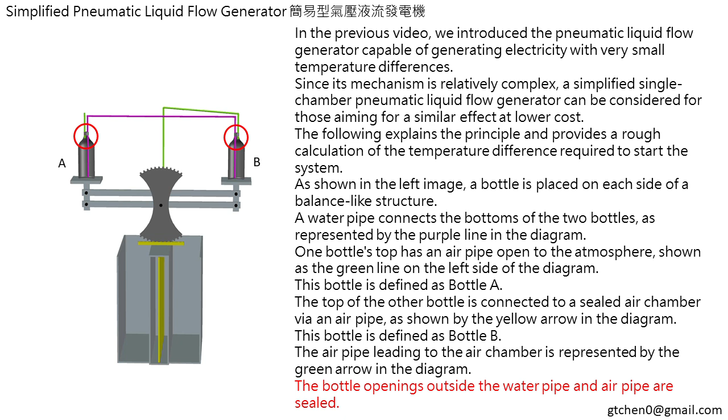The top of the other bottle is connected to a sealed air chamber via an air pipe, as shown by the yellow arrow in the diagram. This bottle is defined as bottle B. The air pipe leading to the air chamber is represented by the green arrow in the diagram. The bottle openings outside the water pipe and air pipe are sealed. The air chamber has two water tanks on either side, one for hot water or other heat sources, and the other for cold water or cooling sources.

Inside the air chamber, there is a thermal insulation plate, shown as the yellow partition at the bottom of the diagram. Above the air chamber, there is a device to guide the movement of the thermal insulation plate, which is linked to the angle of the balance. To maintain better airtightness in the air chamber, this device can use magnet-to-magnet remote linkage.

In the initial setup, low-temperature gas is first injected into the air chamber, and an appropriate amount of liquid is added to both bottles. As shown in the left image, due to gravity, the balance and the thermal insulation plate will tilt to one side. If cold gas is used initially, adjust the balance so that the thermal insulation plate tilts towards the side where cold water will be added. At the same time, bottle B will have more water than bottle A.

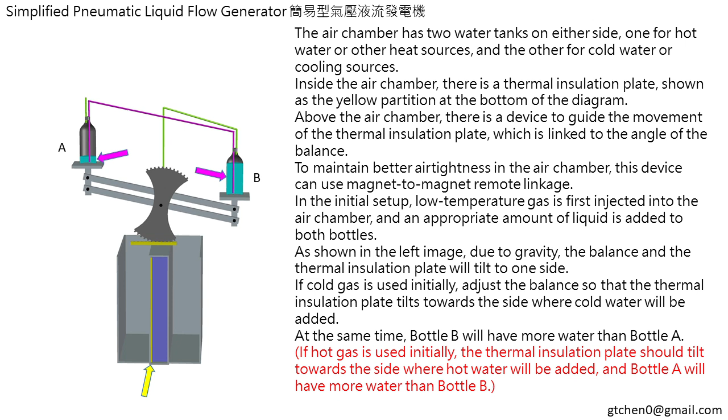If hot gas is used initially, the thermal insulation plate should tilt towards the side where hot water will be added, and bottle A will have more water than bottle B. Adjust the air chamber pressure to an appropriate level. Then, pour cold water and hot water into the respective water tanks. This completes the initial setup stage.

This time, since the heat insulating plate is on the cold water side, the gas on the hot water side is heated, initiating the gas heating process in the chamber. As the gas temperature rises, the bottle connected to the gas chamber, bottle B, increases its internal pressure, pushing water toward the bottle exposed to the atmosphere, bottle A. Thus, the water level in the B bottle starts to drop, while the water level in the A bottle begins to rise.

When the temperature in the gas chamber is high enough to make the liquid in the A bottle exceed that in the B bottle, gravity causes the system to oscillate, initiating the first oscillation process. During the descent of the A bottle, the lower position allows more liquid to flow into it, increasing the oscillating torque, which can be used for power generation.

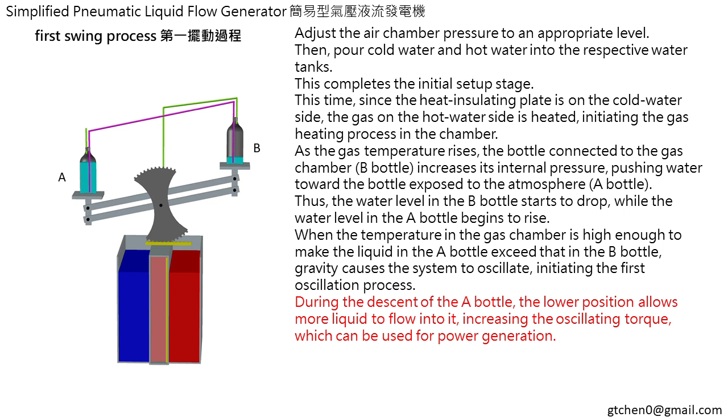In the first oscillation process, the balance movement shifts the heat insulating plate from the cold side to the hot side, causing the gas to contact the cold side and be isolated from the hot side, thus entering the gas cooling process in the chamber. At this point, the gas is cooled as it contacts the cold side.

As the gas temperature decreases, the bottle connected to the gas chamber, bottle B, reduces its internal pressure, drawing water from the bottle exposed to the atmosphere, bottle A, back into itself. Thus, the water level in the B bottle starts to rise, while the water level in the A bottle begins to drop.

When the temperature in the gas chamber is low enough to make the liquid in the B bottle exceed that in the A bottle, gravity causes the system to oscillate again, initiating the second oscillation process.

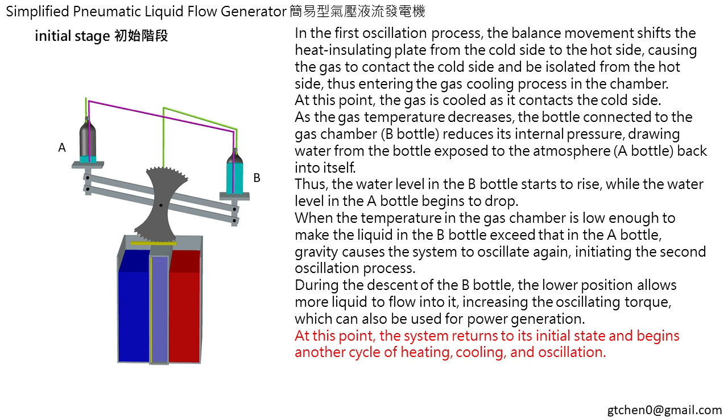During the descent of the B bottle, the lower position allows more liquid to flow into it, increasing the oscillating torque, which can also be used for power generation. At this point, the system returns to its initial state and begins another cycle of heating, cooling, and oscillation.

Thus, it can be seen that as long as the temperature of the hot water tank is high enough, and the cold water tank's temperature is low enough, this device can continuously oscillate automatically, and the energy from this oscillation can be used for power generation. Now, let us calculate how much of a temperature difference is required to generate electricity continuously.

Assume that a commonly used 2000 cubic centimeter PET bottle is used, with the lowest water level set at 45 millimeters and the highest water level at 205 millimeters during the entire cycle. It is measured that the liquid volume at the lowest water level is 315 cubic centimeters, and the liquid volume at the highest water level is 1,480 cubic centimeters more than at the lowest water level.

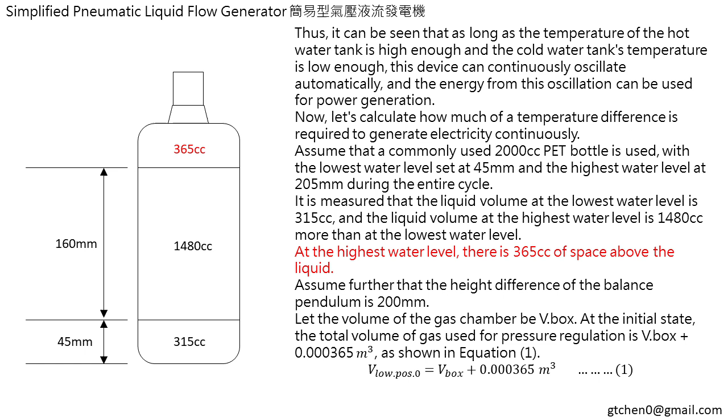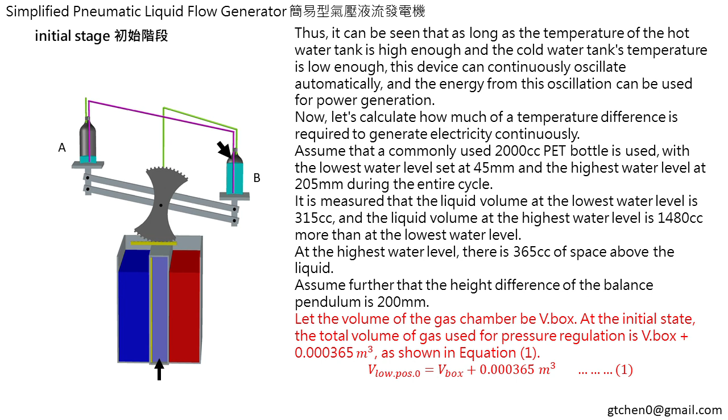At the highest water level, there is 365 cubic centimeters of space above the liquid. Assume further that the height difference of the balance pendulum is 200 millimeters. Let the volume of the gas chamber be V.box. At the initial state, the total volume of gas used for pressure regulation is V.box plus 0.000365 cubic meters, as shown in equation 1.

When bottle B initially rises to its highest position, the total volume of gas used for pressure regulation is V.box plus 0.001845 cubic meters, as shown in equation 2. When the water volume in bottle A equals that in bottle B, that is, at the turning point, the total volume of gas used for pressure regulation is V.box plus 0.001105 cubic meters, as shown in equation 3.

Assume atmospheric pressure is 101,325 pascals. At the initial state, the internal pressure of bottle B is approximately 1.00387 atmospheres, as shown in equation 4. When bottle B initially rises to its highest position, the internal pressure is approximately 0.99613 atmospheres, as shown in equation 5.

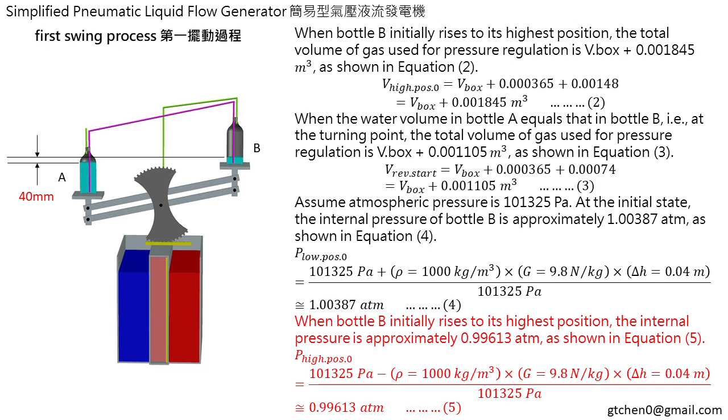At the turning point when bottle B begins to rise from its lowest position, the internal pressure is approximately 1.01934 atmospheres, as shown in equation 6. At the turning point when bottle B begins to descend from its highest position, the internal pressure is approximately 0.98066 atmospheres, as shown in equation 7.

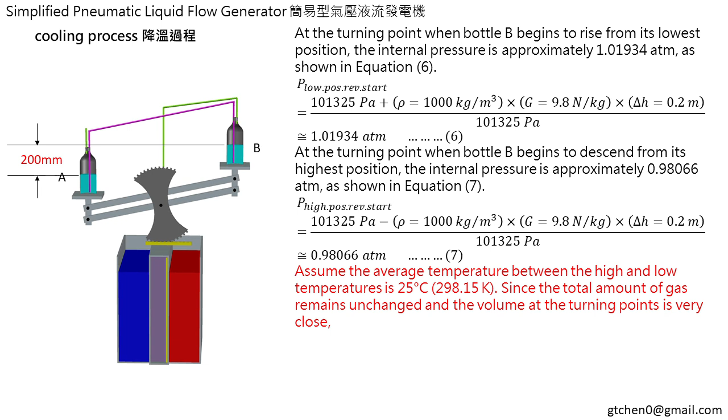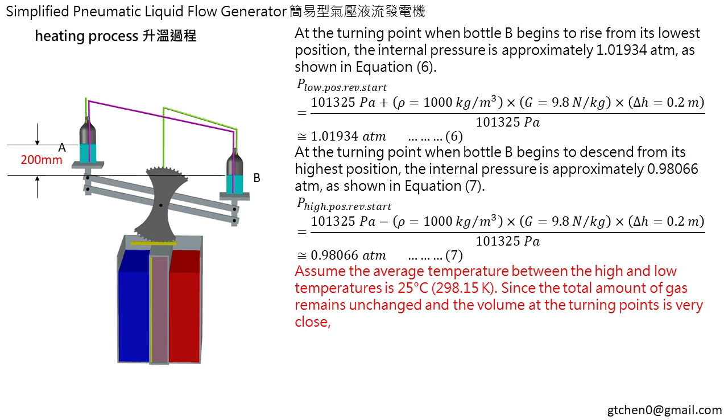Assume the average temperature between the high and low temperatures is 25 degrees Celsius, 298.15 kelvins. Since the total amount of gas remains unchanged and the volume at the turning points is very close, according to the gas equation, the temperature difference of the gas in the gas chamber between the highest and lowest temperatures is 11.535 degrees Celsius, as shown in equation 8.

Due to practical operation conditions being less ideal, it is reasonable to estimate that the required temperature difference under the selected parameters is about 15 degrees Celsius. Next, we need to estimate the approximate required volume of the gas chamber. Assume the turning process is very fast, and heat exchange during the turning process can be neglected.

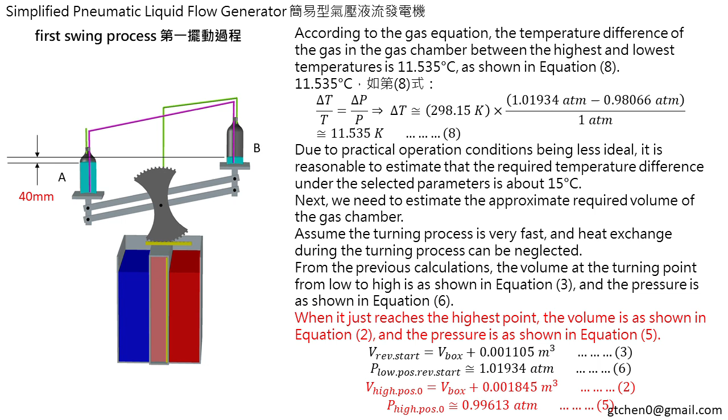From the previous calculations, the volume at the turning point from low to high is as shown in equation 3, and the pressure is as shown in equation 6. When it just reaches the highest point, the volume is as shown in equation 2, and the pressure is as shown in equation 5. Using the adiabatic process equation, and selecting the adiabatic constant of air as 1.4, the required volume of the gas chamber is approximately 40 liters, as shown in equation 9.

From equation 9, it can be seen that the volume of the gas chamber is within an acceptable range. The calculation of energy efficiency will be introduced in subsequent videos.